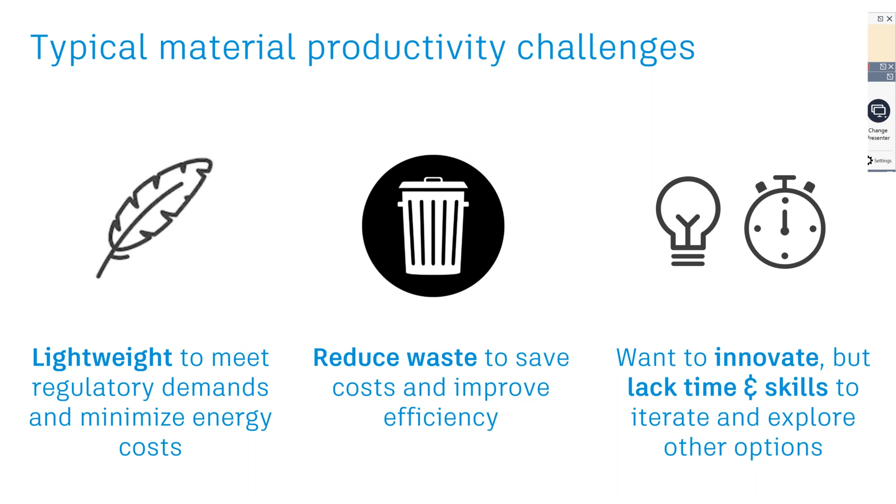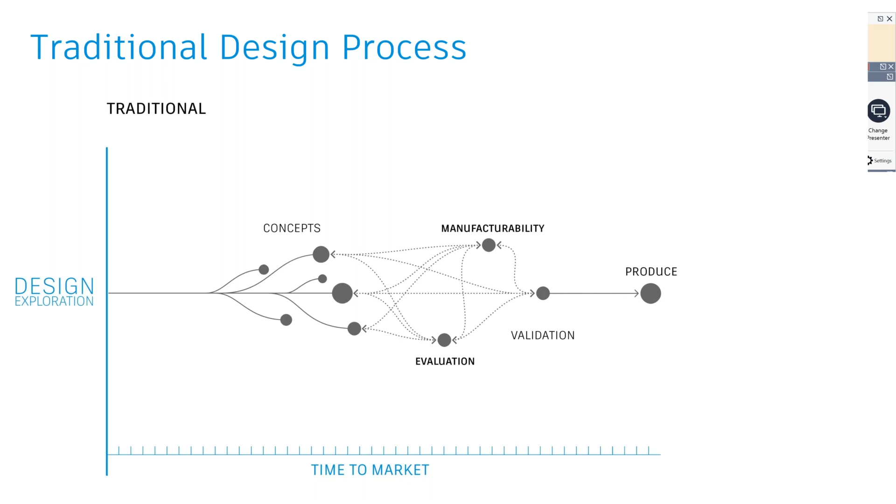So before that, let's look at the traditional design process. In the traditional design process, comparing against time to market, we have a couple of concepts which undergo evaluation, then it is tested for manufacturability and finally validated whether it can be produced or not. Once validated, it moves into production. This constitutes the overall time to market. So there is an iteration phase with limited concepts, and then design to production where evaluation, manufacturability, and validation is done, finally sent into production. This takes a considerable amount of time.

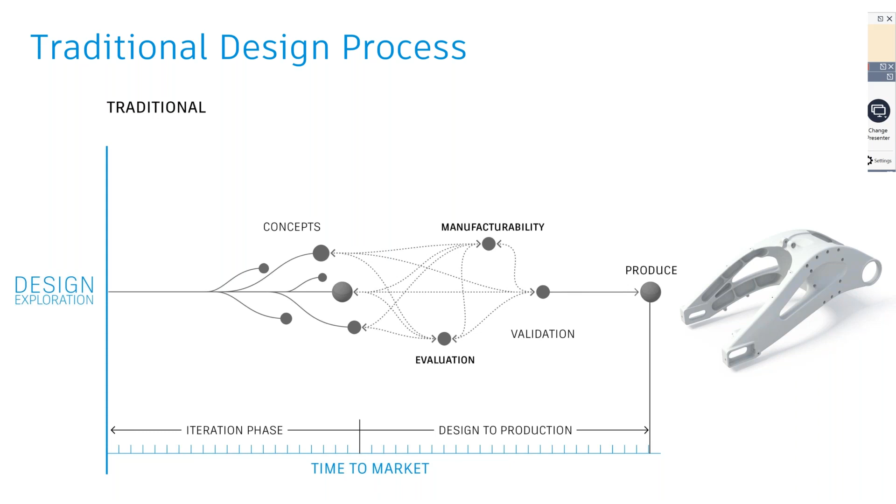So what if I told you there is a way we can expedite this entire process and have a considerable productivity increase in our overall product life cycle? Enter Autodesk Generative Design, a design exploration technology which is part of Fusion 360. This is fueled with the intelligence of humans, along with machine learning algorithms and artificial intelligence, and using the power of the cloud to very quickly provide multiple outcomes which could be production ready.

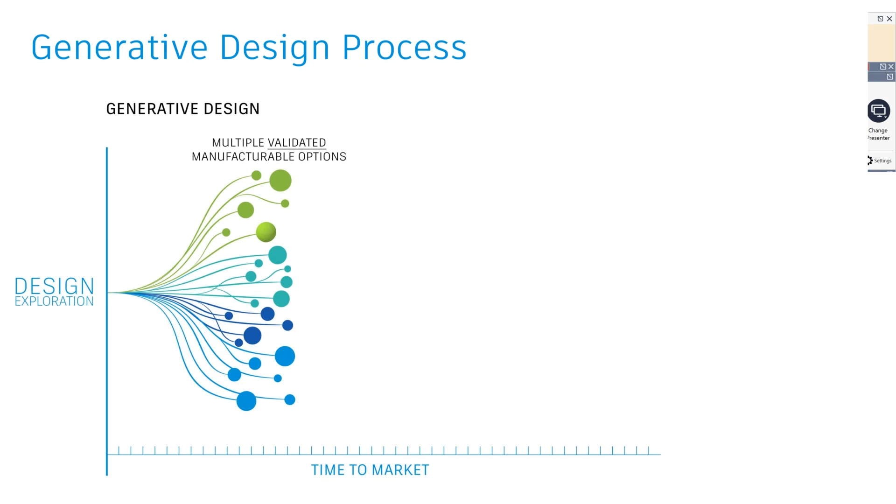So generative design is a design exploration technology which can help us come up with multiple design concepts for a single problem statement, pre-validated for form, function, and fabrication, thus helping reduce the overall time to market. In the newer approach of the generative design process, we have in the iteration phase hundreds of different concepts which are pre-validated and checked for manufacturability, whether they will function as per tech requirements, across multiple materials at the same time. What you have is either production-ready or almost production-ready CAD data which can be directly sent into the production environment. This can have a significant reduction in overall time to market, enabling a greater increase in productivity.

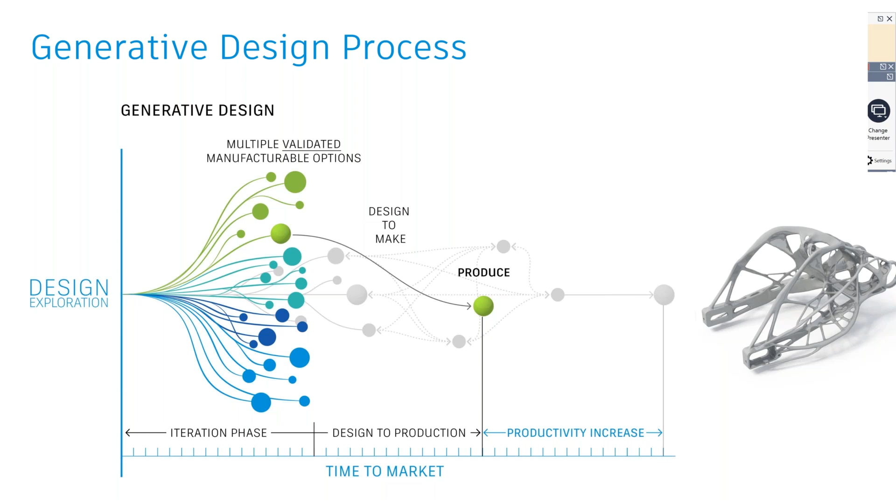Now let's look at why customers are looking at generative design. It is an amalgamation of human and machine interaction, which can help me very quickly improve product performance by means of lightweighting, or ensuring it has enough structural integrity and durability during the initial design phase itself.

It can act as a tool which can help greatly increase product innovations, explore more design concepts, check different manufacturing methods, and ensure there is no bias based on design that we as humans carry. It can also help greatly reduce product cost by lightweighting components, or reducing overall consumption of raw materials.

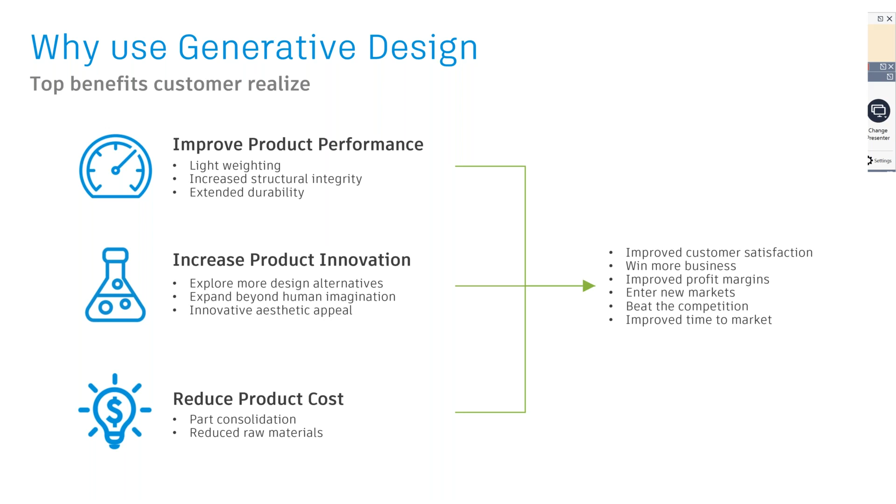Or even consolidating different components into a single functional component, thus enabling our customers to have improved customer satisfaction, improved time to market, and be a market leader in their respective spaces. So what generative design will enable you to do is create multiple outcomes which are CAD ready, or almost CAD ready.

We will also be enabling in the near future a cost estimation tool where engineers can evaluate the trade-off between performance and cost to make the component. If I use this manufacturing method, what will be the overall cost borne as against a different manufacturing method, right within the tool itself, which can help quickly make decisions and take into consideration the best manufacturing method that needs to be looked into.

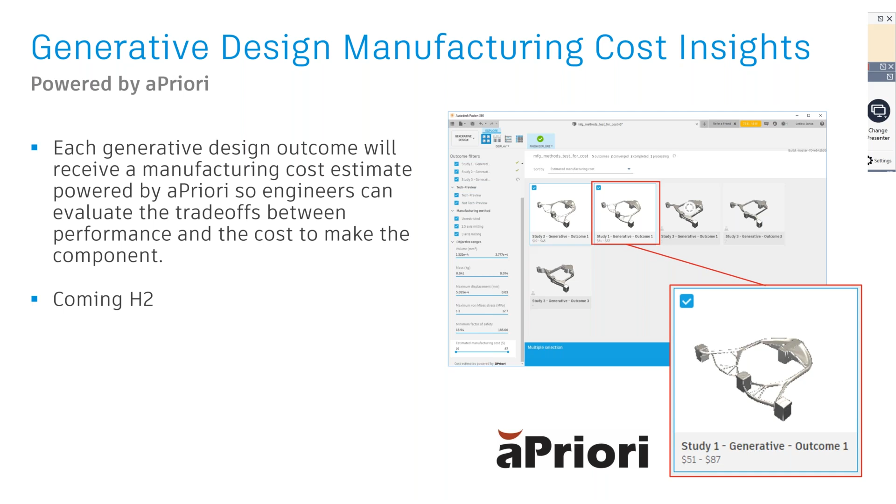Now, we have seen in the last couple of years a lot of discussions around additive manufacturing, and I know for sure that a lot of our customers have already adopted one form or another of additive manufacturing or 3D printing. It's no secret that almost always additive manufacturing outcomes provide the best performance outcomes. It can help lower my mass, come up with shapes which can be manufactured, any kind of a crazy or alien shape which can be manufactured across different types of materials.

But at this moment, there are certain things which are prohibiting us from completely exploring additive manufacturing. We see that the overall manufacturing cost is a bit higher in metal additive, and at this moment it is not ideal for large or high volume production needs.

Now, the reason I am talking about why additive manufacturing is gaining traction in the industry, as well as with a lot of R&D and money being pumped into its research and development, we will see that in the near future, additive manufacturing will become one of the premier manufacturing methods as well.

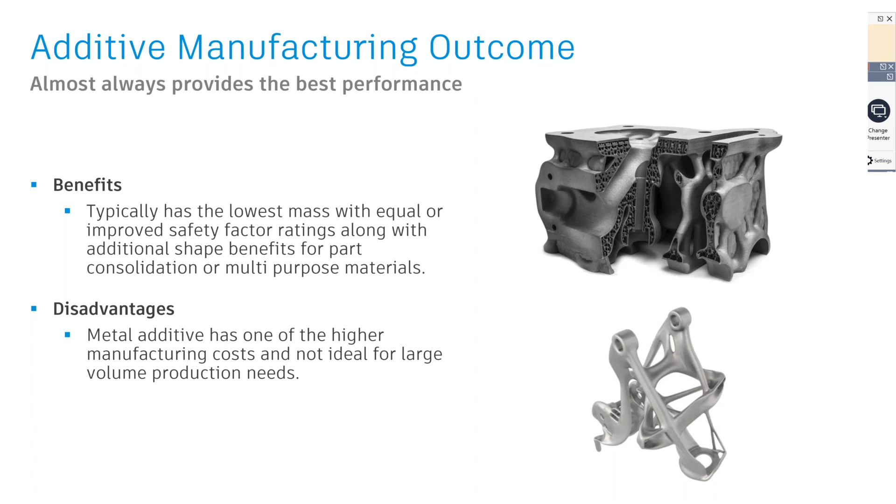Now, let's look at the overall manufacturing cost insight as against different manufacturing methods. We have already established that at this moment additive manufacturing is pretty costly and might not be sustainable for large scale volume production. But hands down, we know that CNC milling is the most sought-after manufacturing method when it comes to large scale volume production. And if it's a huge volume production, then we know that die casting by far beats everybody hands down when it comes to large production volume.

Now, one of the reasons I'm talking about this is there is a lot of confusion in the industry when we talk about generative design. Everybody assumes that whenever we say generative design, it is basically to adhere to additive manufacturing or 3D printing design. But what we have done uniquely is we have understood that at this moment the industry might not be ready for additive manufacturing, but still we would also have to support our conventional way of manufacturing.

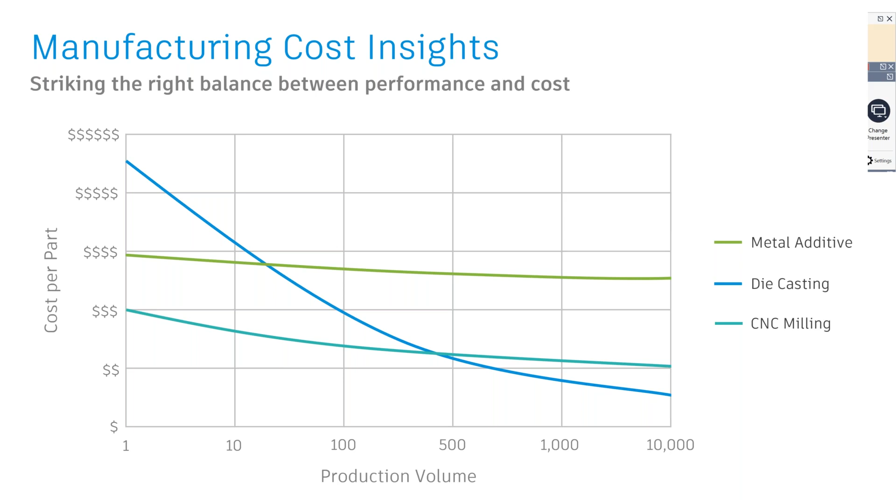That is, it could be your die casting, it could be your 3-axis milling, 5-axis milling, 2.5-axis milling, or even 2-axis cutting as well. So Autodesk Generative Design supports all these different types of manufacturing methods, and we are including other different types of manufacturing methods as well that will come in the near future. It could be different types of fabrication, molding and tool design. So all those things will come in the near future as well.

So at this moment, generative design supports additive manufacturing, die casting, different types of milling, as well as cutting operations as well.

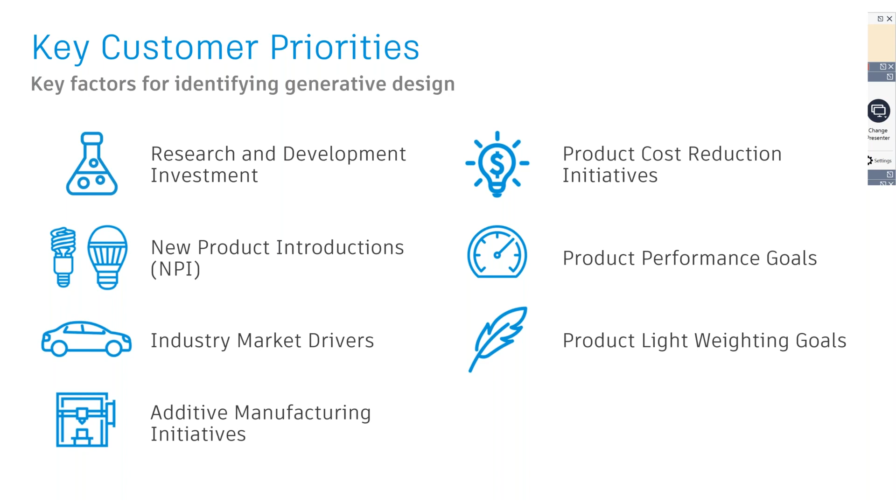Now, let's look at why you should be interested, or who should be interested in testing out or trying out generative design for their internal purposes. As customers, I meet a lot of people, and any customer who has priorities in these areas - it could be your R&D investments, additive manufacturing initiatives, huge lightweighting goals, cost reduction, or even new product introduction - Autodesk Generative Design could be the right tool for you to look into it and invest into it, to ensure that you are able to meet all your different types of priorities.

Now let's take a look at a couple of examples by means of a radar chart. From a scale of 0, which is not at all important, to a scale of 5, which is very important. If we look at the different types of customer profiles, we see that customer 3 has more number of initiatives which fall under my radar. So customer 3, customer 4, and customer 1 are most likely to gain benefit out of generative design, where it can help them to meet most of their internal business criteria or business priorities.

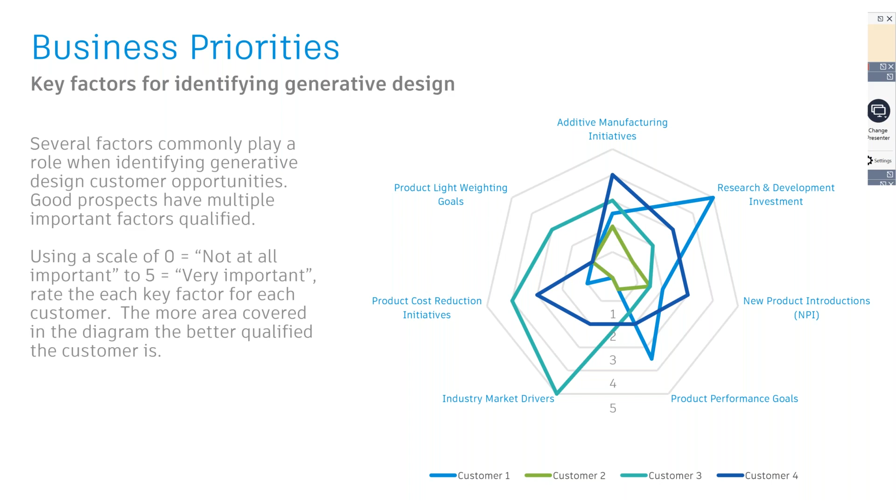And we have done this exercise with a lot of different customers. We do something called a documented discovery with our customers, where we understand their priorities, their business challenges, and their business priorities, and we map as to how different technologies can help them in terms of achieving those priorities.

And if I take a look at General Motors, where we work with General Motors very closely in terms of their initiatives on newer vehicles, on their electric vehicles, we found that most of their priorities fell under the different business priorities that they had carved out for themselves, and Autodesk Generative Design was able to fit right into their business priorities, and we were able to have a very, very healthy partnership with them in terms of enabling them to achieve their business priorities.

And in terms of industry segments, basically this is industry agnostic. It could be people from any industry, they can start using generative design for their purposes, where if their entire focus is in terms of performance, lightweighting, innovation, and also looking at different manufacturing initiatives, generative design would fall right into their priorities as well. So it could be automotive, aerospace, industrial machines, or even consumer applications.

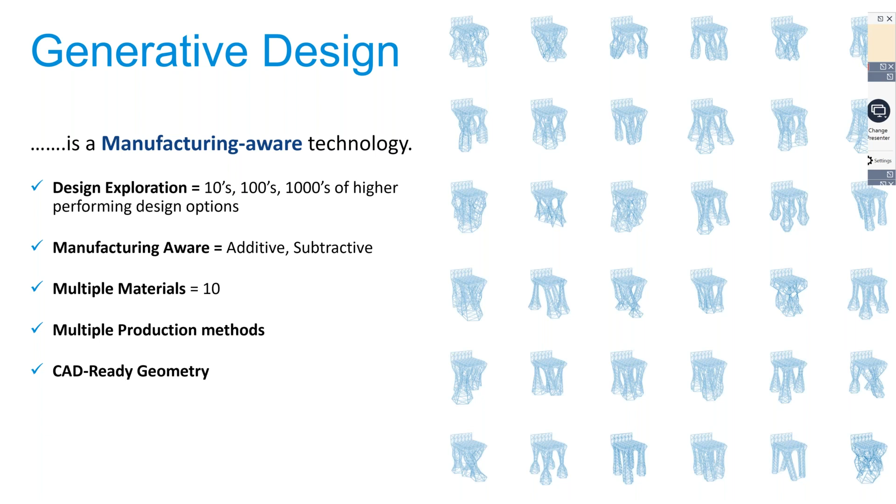It could be additive or any of the conventional manufacturing methods, and tested out for different types of materials, and the outcome will be a CAD ready or an almost CAD ready geometry which can then be sent into the production environment.

Now, the way we work with generative design is, it's basically a human machine interaction tool, where as humans we are very good at articulating a problem, defining a problem statement, or defining the goals of my particular problem.

And the best part is, all these machine learning algorithms or AI are not biased at all. It does not have any kind of design bias. And finally, equipped with the cloud computing power that is available, it can help provide hundreds or thousands of different design options for a single problem statement, out of which I can go ahead and start identifying the best possible designs which meet all my requirements or prerequisites.

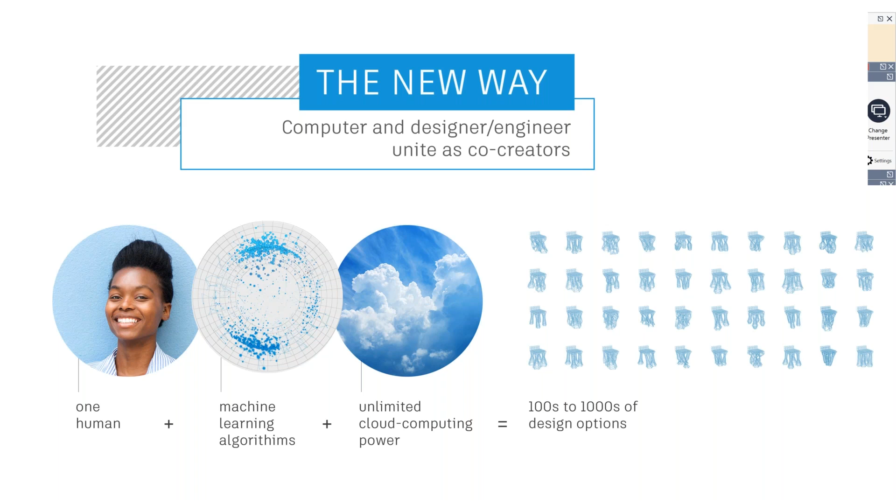Now, I talked about design bias. I'll give you a simple example. You can also think about it. If somebody asks me to design a chair, automatically my mind will go into a place where a chair will have either three legs or four legs. Reason being, from my childhood, I am used to seeing a chair which has either three legs or four legs. So most people, I'm not saying everybody, but most people will automatically start designing a chair which has either three legs or four legs.

But a system or a computer will not have this bias. This bias is called design bias. We humans are sometimes tuned by certain design bias, but a system will not have this kind of design bias.

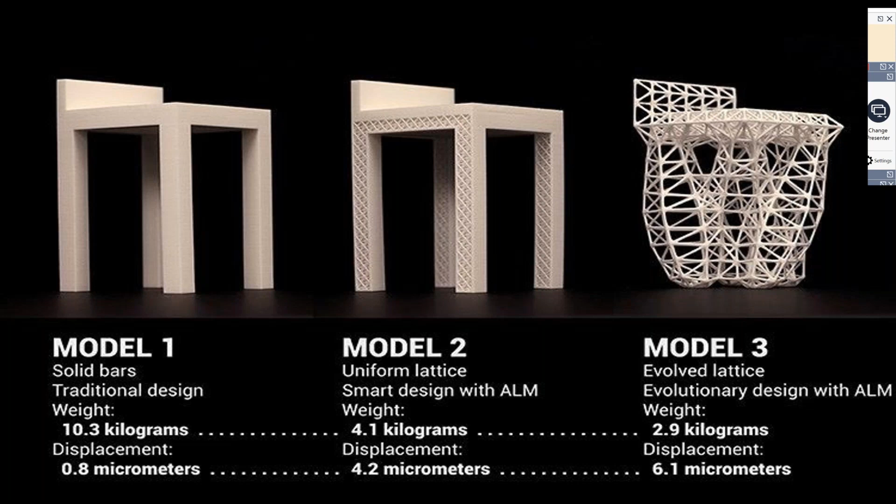So the factor of safety more or less remains the same from my generative design to my baseline design. And the overall workflow is pretty simple and easy. As an engineer, you need to set the goals and constraints. You need to define the loads, you need to define the materials, run it on the cloud. The entire solving happens on the cloud. You explore multiple results, and then if one of the outcomes is for additive manufacturing...

we have tools like Netfabb, which supports the entire design and manufacturing, especially for additive manufacturing, called Autodesk Netfabb, which helps in terms of reducing the support materials, what should be the orientation, how it should be placed, and validate the overall 3D printed part. So basically the overall workflow is very simple and easy to use.

Now let us take a look at a couple of examples of how generative design can be used at various different products or product lines. As I said earlier, generative design is not just limited to aerospace or automotive. It can be used by industrial machinery or any different industry. So let's take a look at a pick and place assembly. A pick and place assembly will basically have a modular structure which houses the vacuum pumps and the air channels. Now, if I want to reduce the overall weight of this particular modular structure, how will I go about it?

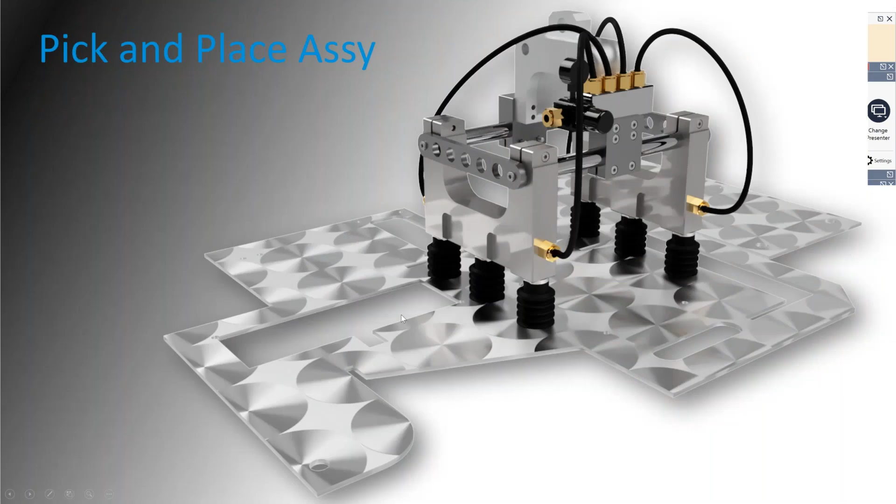So basically, if I have to define a pick and place assembly, it will have a vacuum cup with air channels along with modular structures.

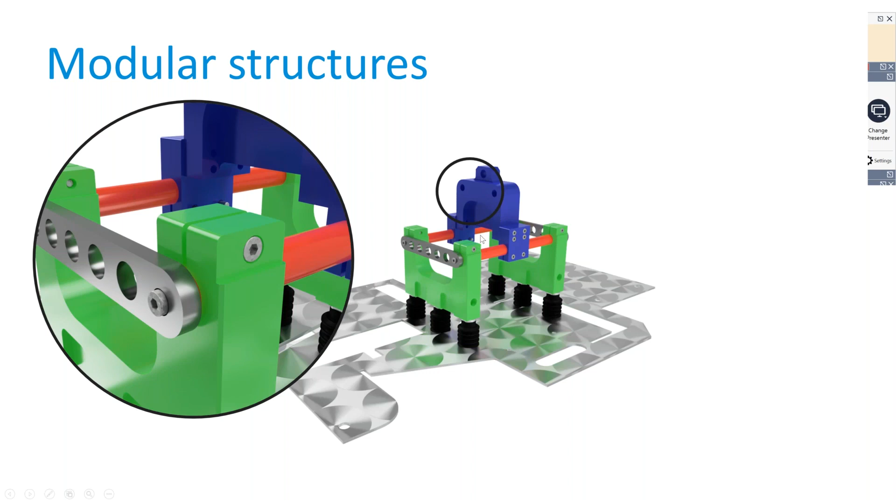So these structures, I need to make much more efficient and lightweight. I'll run the generative design on top of it, keeping in mind where it is being constrained, where it is being fitted, whether it is bolted, how it has to be placed, and what are all the different loads that will be applied during the operational activity.

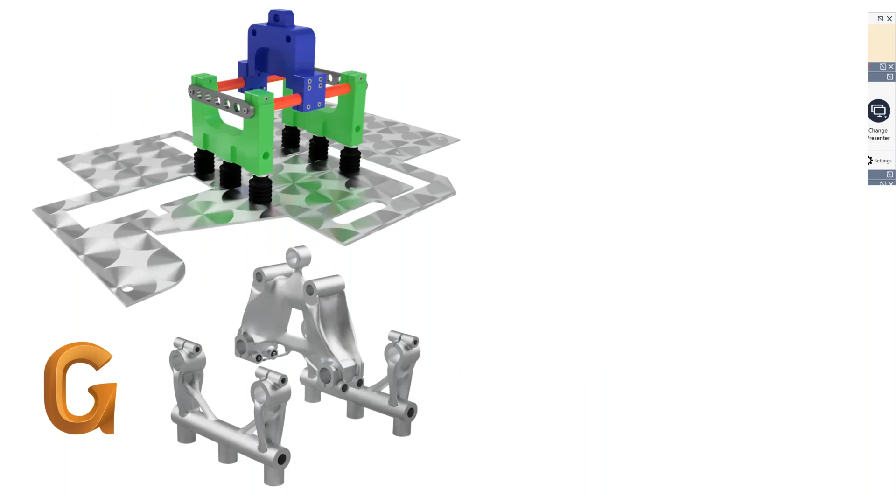Upon which I start getting different types of outcomes which can be tested upon. One of the outcomes is a shape like this, where it is much lighter than my original shape, and we can see a lot of material has been removed. But at the same time, it does not compromise on the factor of safety.

Or it can come up with a very, very alien looking shape which can only be manufactured using a 3D printed part. But the benefit here is now three different components are fused into a single component, consolidated into one working part.

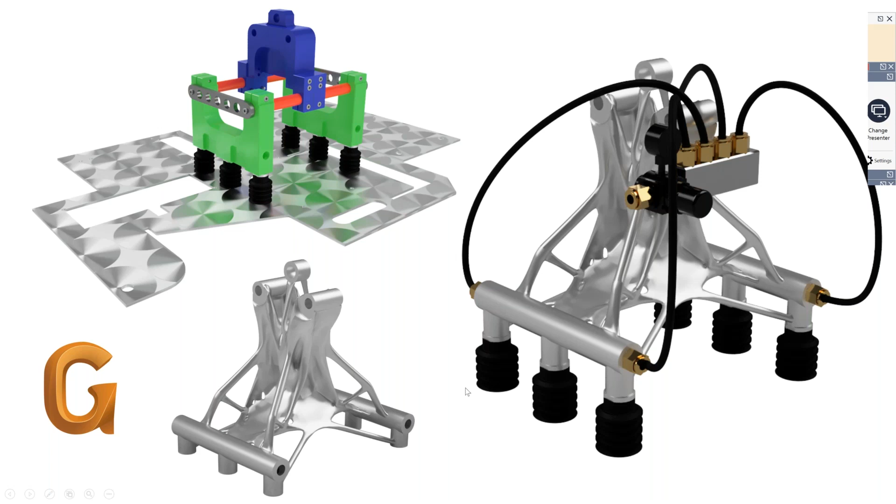And then I can go ahead and test it out for various other manufacturing methods as well, not just 3D printed, but for others as well.

So one example is 3D printed, where I am now taking this into Netfabb to check for my orientation, the support structures, and which is the best possible position it has to be placed, so that I have more outcomes and less wastage.

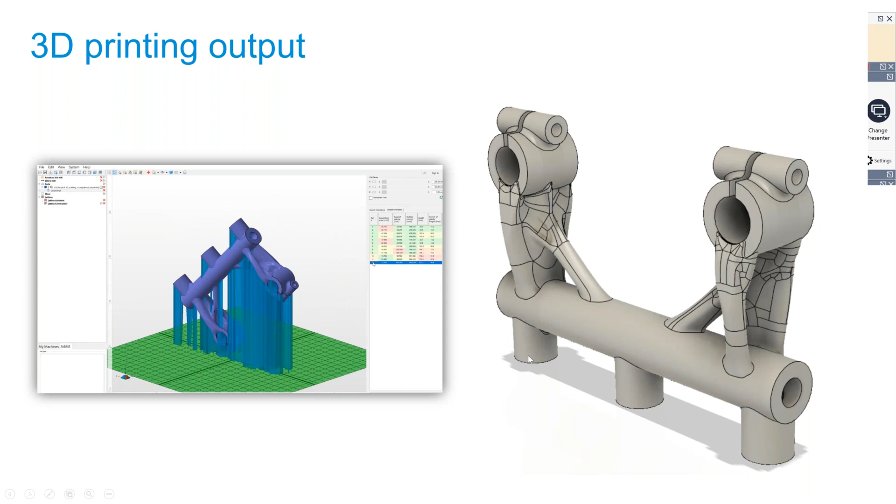Or it can be tested for a milling operation, where I can go ahead and mill it and check for different types of cycle times that we can generate out of it.

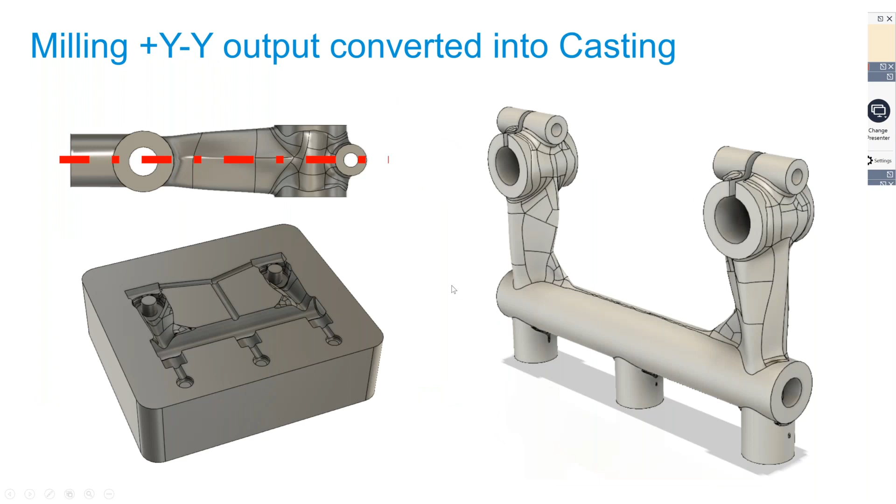Or it could even be a casting option that you can generate out of it. Or I can even run a 2.5-axis milling operation, where I can further enhance the model to have various different shapes and sizes which meet the criteria for 2.5-axis milling operations as well.

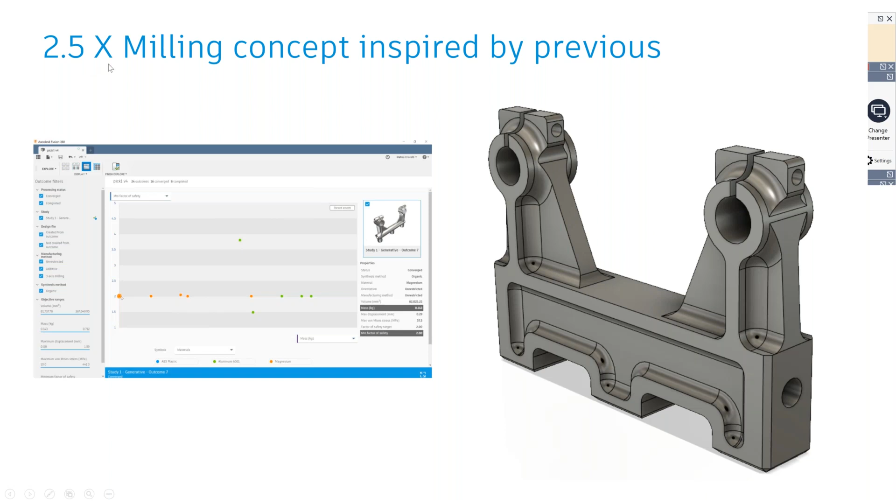Now let us take a look at a different example. This is a bracket. This was one of the first benchmarks or proof of concept that we did with General Electric.

This is a GE bracket where they wanted to drastically reduce the weight of this particular bracket. So the entire problem definition or problem statement was defined, with the different loading conditions, the different materials, and they wanted to test it out for additive manufacturing only.

So in this case, as designers, what do I know? I know that this bracket is being placed and it is part of a much bigger assembly. It is being fixed at these four locations, and there is a clevis pin which will be connecting with another moving component across this particular region.

So how will I start going about my work in generative design using Fusion 360? There are certain things that need to be defined. I'll just repeat it again for the sake of clarity. In this case, what is my problem statement?

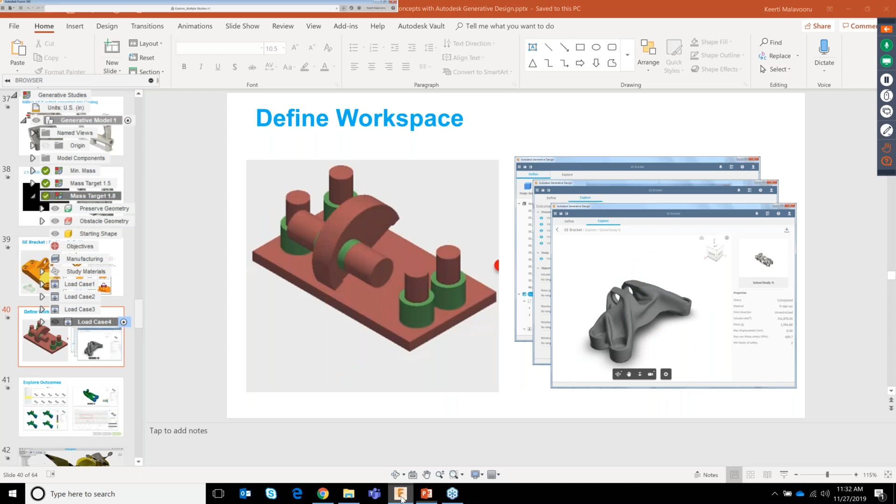So using this as a starting point, how do I start defining my conditions? This is Fusion 360. So if people are not aware about what Fusion 360 is all about, Fusion 360 is a cloud-based 3D CAD CAM CAE tool which can help you in terms of your entire product life cycle in a single tool.

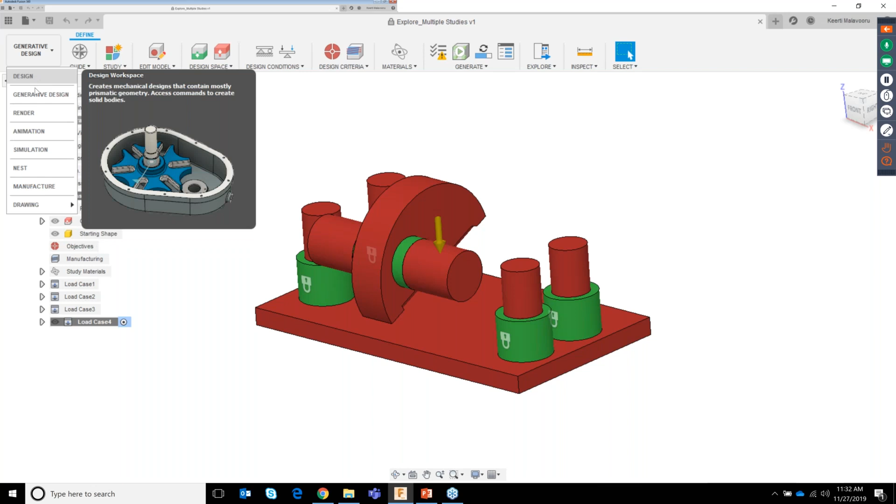So if you look here, I can do my entire design, generative design, rendering, animation, simulation, nesting, CAM, as well as create my documentation or drafting right within a single window itself.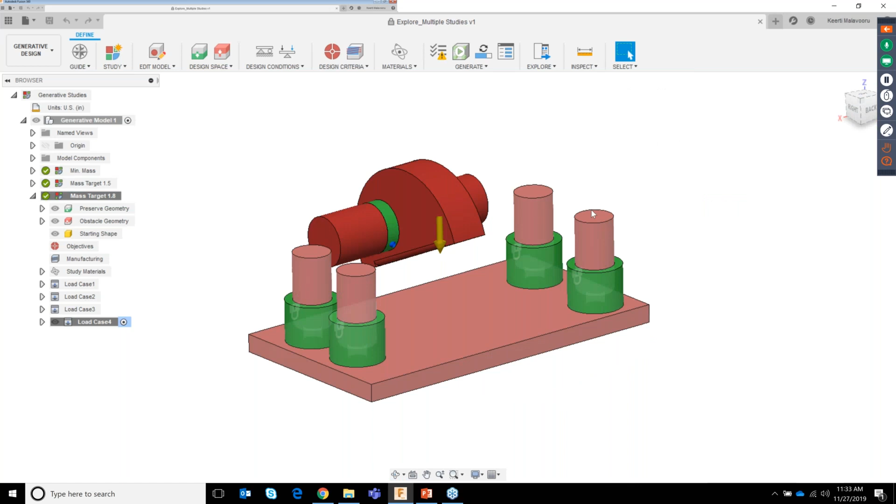So what I need to define is basically these are my regions which have to be preserved. What it means is this is required for me to start iterating to create multiple concepts - these 4 bolting locations and the locations where the clevis pin is going to go.

Next is I also need to define my obstacle geometry. It means that there will be a pin that will be inserted here, so I don't want any kind of material to be added here, because there will be another component that will be placed which will be assembled by means of the pin. So I need to ensure that there is no material added here, and there should not be any material that passes through my bolted holes as well. So I just define my preserve geometry and my obstacle geometry.

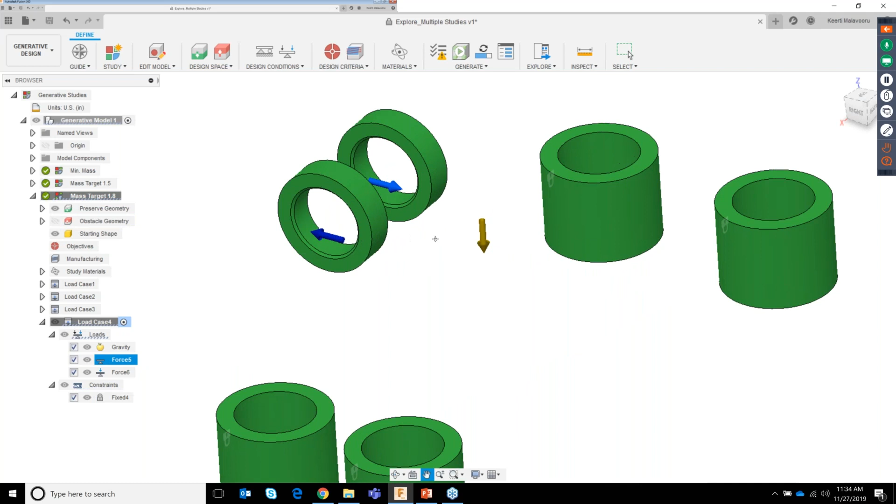Next thing what I need to define is my constraints - how it is being constrained. I know that it is being constrained at these 4 locations, so it is fully fixed. And then I define my forces - what are all the different forces that will be acted here? In this case, it's a torsional force that will be acted, one in this direction and other in this direction. I can add different types of forces - pressure, moment, and bearing load - and define my forces here.

Once this is done, the next thing I need to define is what are the objectives for it. Do I want to minimize mass, or do I want to maximize stiffness? If I want to maximize stiffness, I need to provide the safety factor and what is the bare minimum mass target that I would want to achieve. If you also want to test it out for your modal frequencies or vibrations, I can define that as well - my first mode frequency, and what should be the maximum displacement that it can incur during the creation of different models. I can define my displacements in various different directions as well.

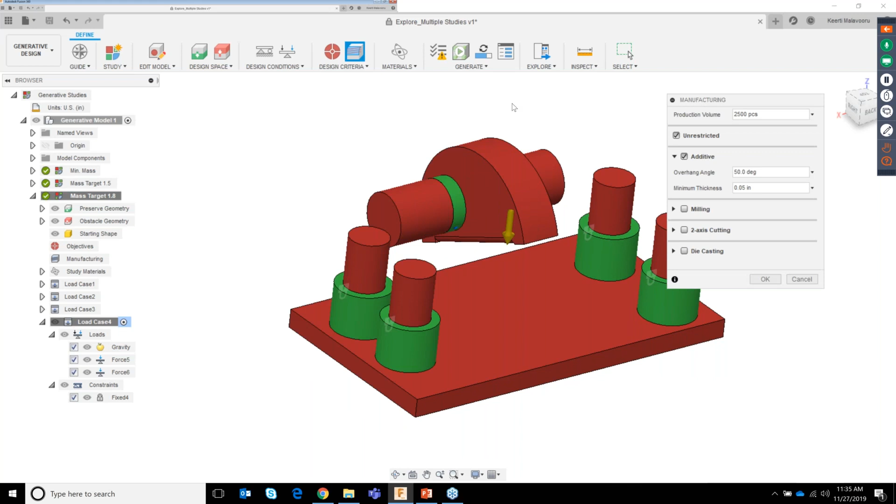And then I define my different manufacturing methods - how many pieces I want, the different types of manufacturing methods, whether it is additive, what should be the overhang angle or the minimum thickness. If I am defining it for milling, whether it is 3-axis milling, 2.5-axis milling, or 5-axis milling, what should be the tool direction, only in Z plus or Z minus, or in all directions. You can define your tool diameter, shoulder length, head diameter, everything. In this case, I'll not be using milling.

You can also perform 2-axis cutting operations in different directions, X, Y, or Z. And if die casting is something that you want to look into, I can start defining where the ejection direction should be, the draft angle, and the minimum and maximum thickness can also be defined.

Once I define my manufacturing methods, I can start adding the different materials I want to use. I can analyze or iterate up to 10 different materials for a single problem statement - different types of materials that are available. It comes with a huge library of materials, either for metals, liquid, glass, and other things.

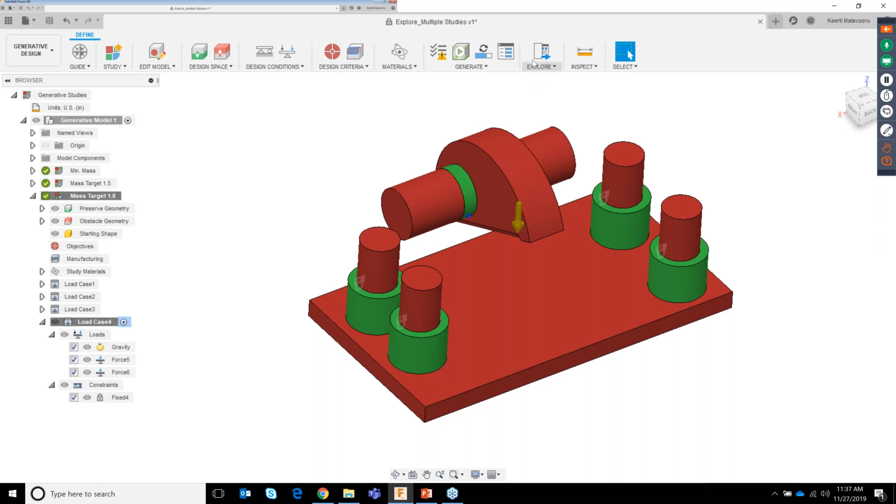You already have a huge library of different materials available, and then you can go ahead and generate. What it will do is, once you define generate, it will push the entire data onto the cloud, and very quickly different concepts will be created and sent to your system for a detailed study or analysis on top of it.

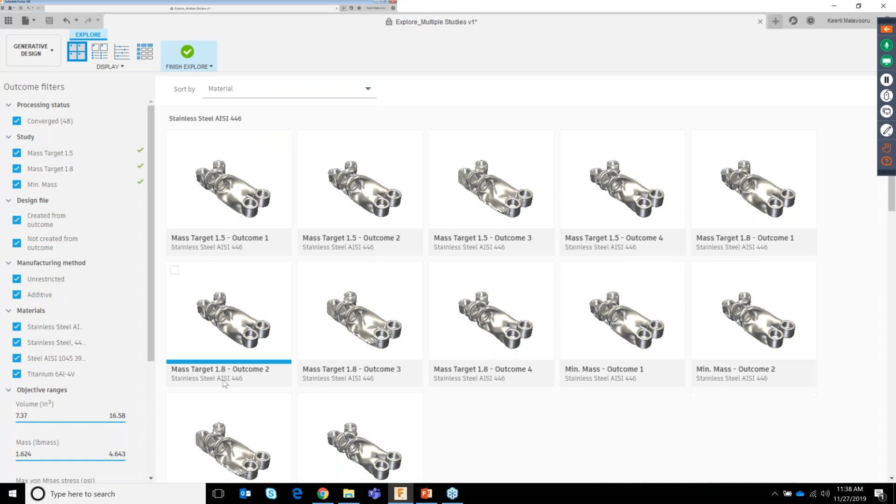So in this case, I have already run the iterations, and I have multiple different types of designs or concepts that have been created for different manufacturing methods, whether it is additive or unrestricted, or if I would have defined other manufacturing methods - those would also be available for different types of materials, whether it is stainless steel, different grades of stainless steel, or titanium or any other materials that you have defined, or based on the different mass.

So it varies from 1.624 to 4.643. Or even on the left hand side, you can go ahead and start filtering out by volume, by mass, or your von Mises stress, factor of safety, etc.

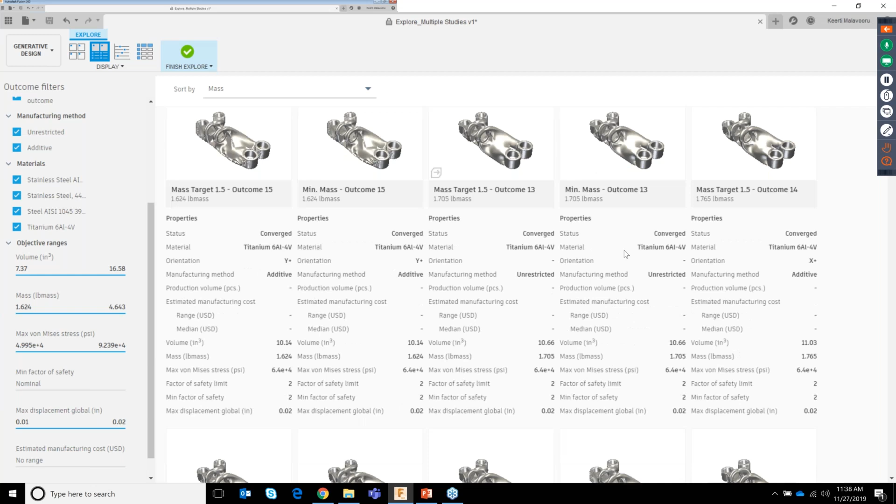There are different ways by which you can go ahead and filter out solutions. We have thumbnail views, I can do a side by side comparison of different types of results that have incurred, or a scatter plot view where you can see the outcome against minimum factor of safety and materials, or manufacturing method. Or if you want to check for minimum factor of safety, I can analyze it for different types of results or outcomes that are available.

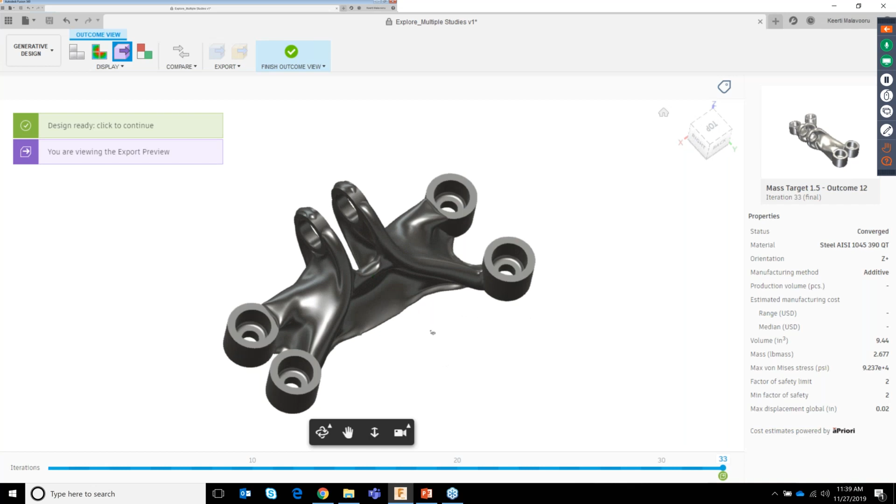So let's look at a couple of those things. I can go ahead and have a much more detailed understanding of my particular design. It shows me how my design has been created. I can check if there are any kind of stresses that are generated. I see that there are some stresses generated here. What is the maximum stress? What is the mass and other things?

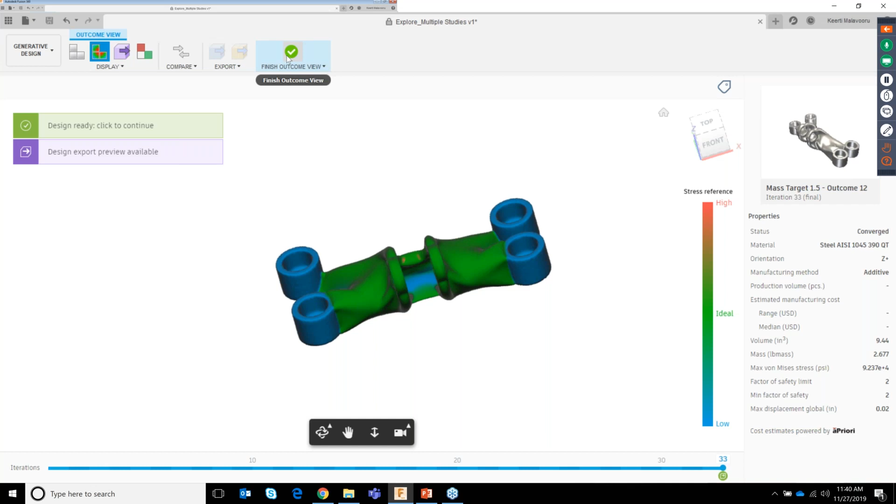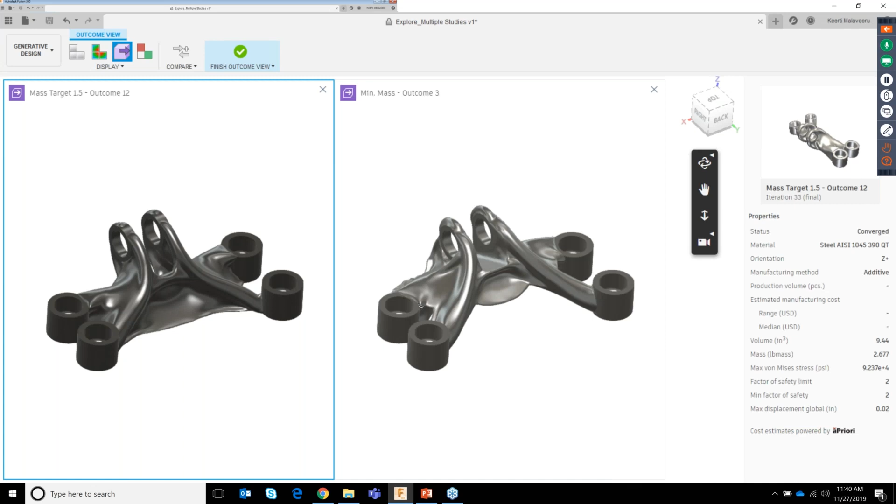Or I can even go ahead and compare it with different models, have a side by side comparison between different models, as against two different models. I think both of them are more or less the same, but I hope you got the gist of it, where I can see how the overall factor of safety is, and the strength, where my stresses are, high stresses are, and all those things can very easily be viewed using the outcome viewer in generative design.

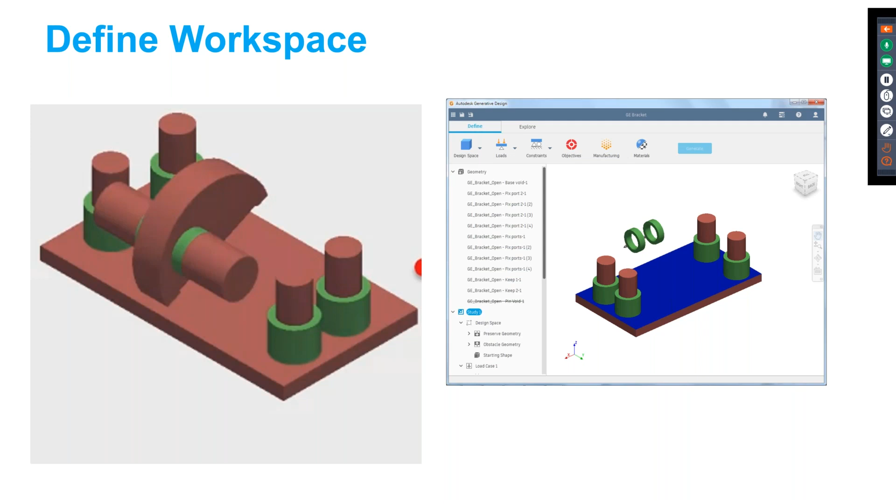So I hope you got the point. The overall workflow is very simple. You need to define the goals, create preserve regions and the regions which will act as an obstacle, define your loading conditions, define constraints, add materials, add different types of manufacturing methods, and run the analysis. The analysis runs on the cloud, and very quickly it will throw you different types of results through which you can start filtering out those results which best suit your requirements and needs.

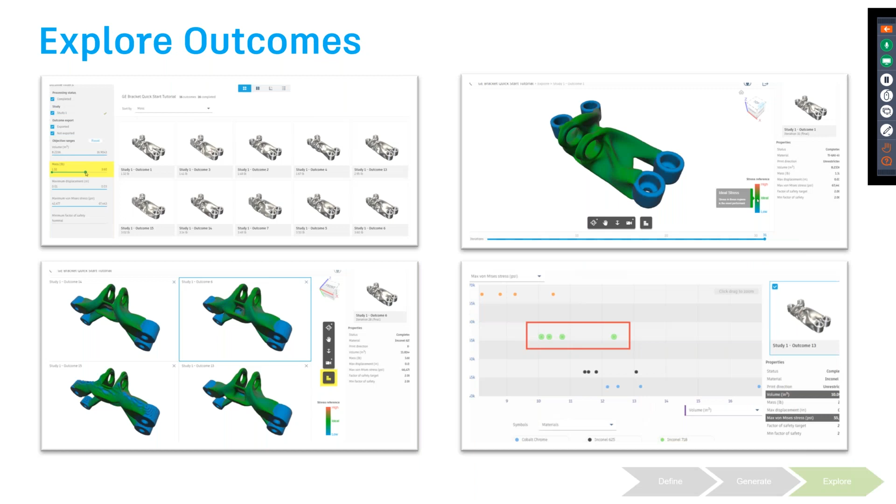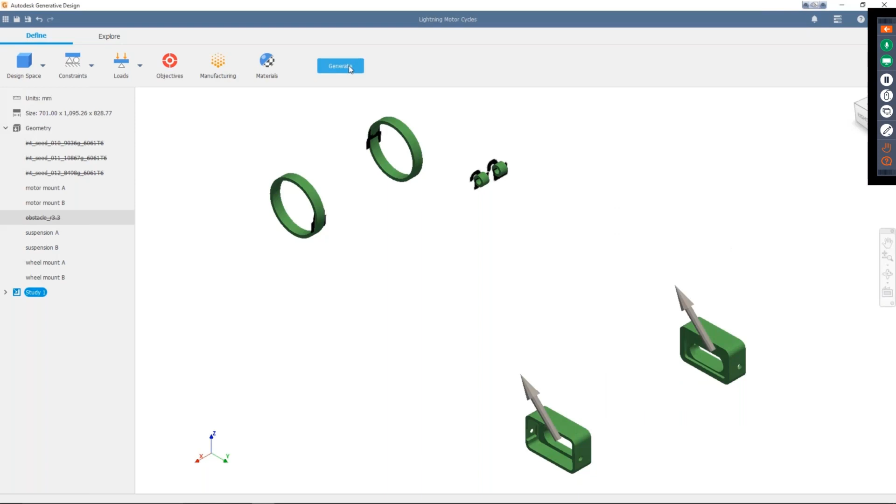Similarly, we have another example. This is an example of a swing arm of a two-wheeler, where the customer wanted to drastically reduce the weight of it. So they first identified their design goal, where it is being constrained. They mapped it for various different manufacturing methods, materials, and their objectives, out of which they generated multiple outcomes.

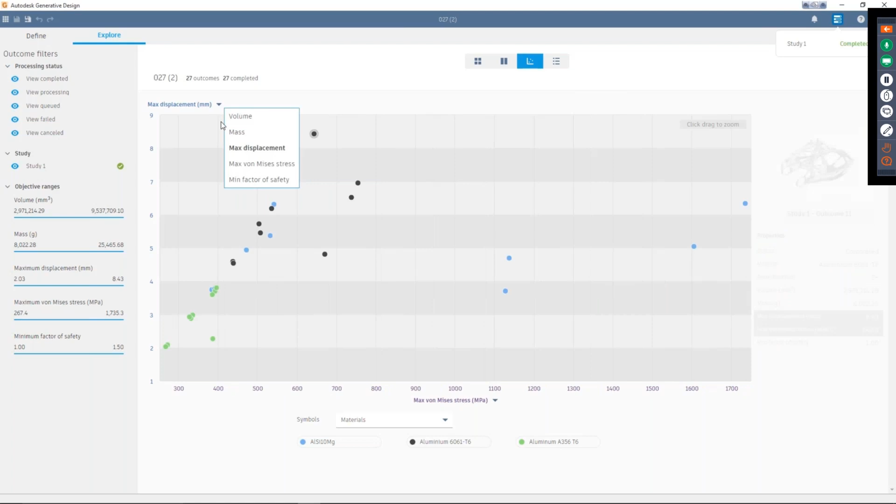And they started filtering out those which follow their particular technical criteria. Using those 3 or 4 final design outcomes, they did a much more deep dive on the outcome, analyzing it for various different types of FE analysis to understand its structural integrity, whether there could be any failure that we can anticipate.

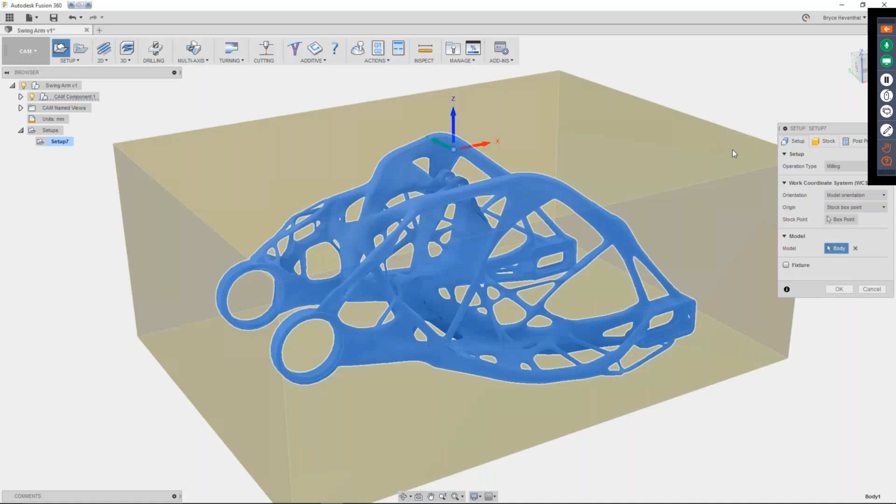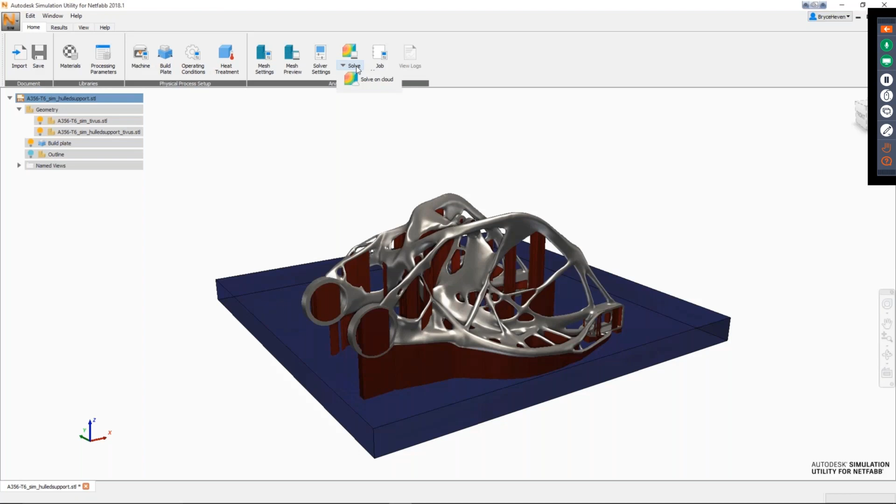And then using the CAM functionalities right within Fusion, they were able to create the CAM programming for a hybrid manufacturing, that is your 3D printing and finally finishing it off with conventional or subtractive manufacturing. So they used Netfabb to understand how the support structure should be and the structural integrity of the support structure, and finally used Fusion CAM to do the finish touches on that particular swing arm.

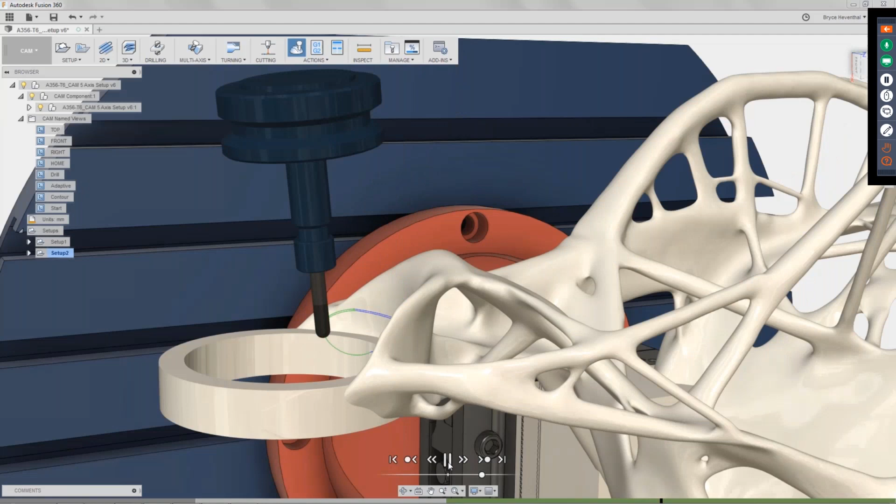Now this is being manufactured and is already being rolled out to their customers, which is a much more efficient as well as reduced weight version of the original swing arm.

Now let's look at a couple of customer stories around the world, across various industries and across various different types of manufacturing methods. The first one is General Motors.

So we work very closely with General Motors in terms of their business goals to have a lightweight vehicle, as well as in their electric vehicle program, where one of their concerns was not only in terms of reduction of weight but also in terms of reducing the number of moving components. So one of the major goals for them was to have more components fused into a single component.

So they identified one of the seat belt brackets, and they wanted to fuse or consolidate 8 moving components into a single part, which should be 40% lighter and 20% stronger.

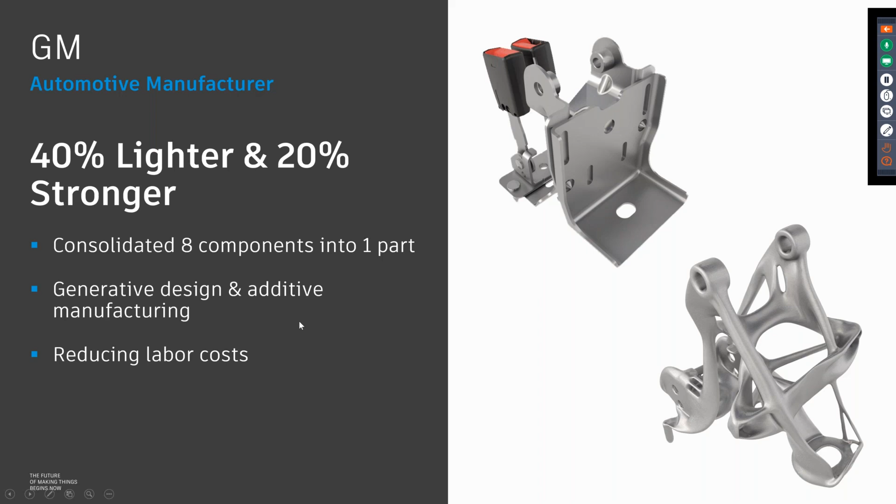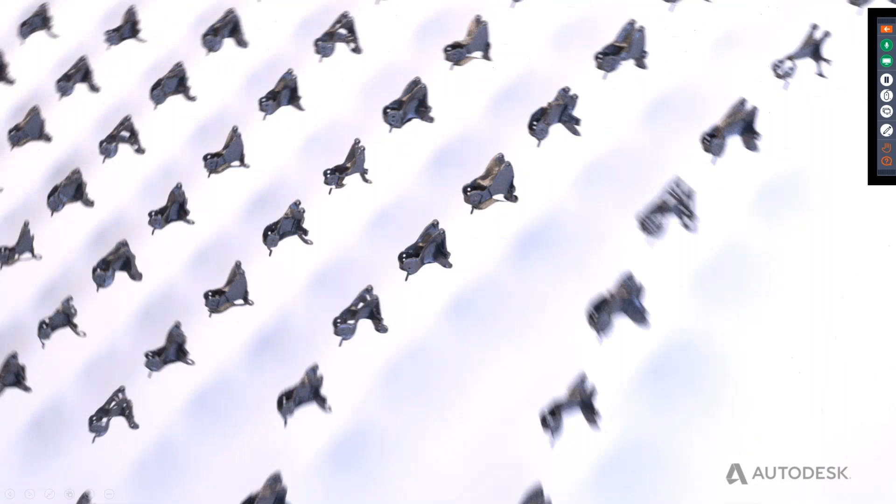So they used Autodesk Generative Design and were able to come up with multiple outcomes. They did a deep dive in terms of different manufacturing methods, structural integrity, and validation, and were able to freeze upon a couple of those designs, which are now being tested rigorously for feasibility and workability. This is a completely 3D printed part, being researched and tested in their facility right now. This was a seat belt bracket, and they were able to successfully fuse 8 moving components into one single component.

Similarly, this was for an aerospace customer. As you know, in automotive or aerospace, every gram that is saved or reduced has a big impact on performance and fuel consumption. So they wanted to drastically reduce the overall weight of their brackets used at multiple locations, and they were okay with additive manufacturing and using generative design. They were actually able to reduce their overall weight from 325 to 135 grams, while using titanium as their material.

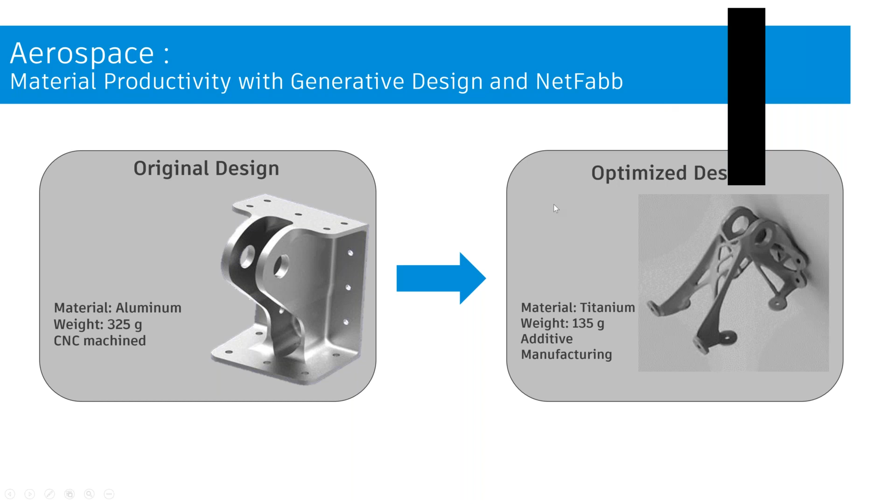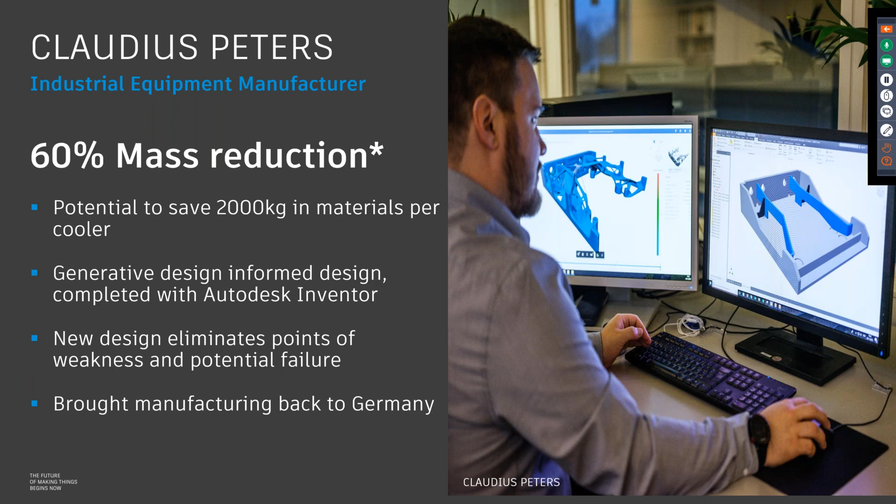Again, one more manufacturing customer, Claudius Peters. They basically make clinkers used in cement production facilities, where this clinker is subjected to very high temperatures, and currently this is a very heavy component. They used generative design to drastically reduce the weight of those clinkers from close to 150 kgs to around 50 kgs, reducing two-thirds of the overall weight, without changing their manufacturing method - still using conventional manufacturing to produce these components. This is used at various stages, not just a one-off component; there will be hundreds and thousands of these used. Imagine the amount of cost and material being saved, as well as them being a sustainable customer in terms of reducing overall consumption of raw material for manufacturing these components.

We also work with a lot of different space organizations. NASA is one such, where for one of their landers, they wanted to use generative design and come up with an entirely different shape, which led to a 35% reduction in overall mass. Imagine the amount of fuel that will be saved during the launch process. They are validating it with various different manufacturing methods, where it will be a hybrid of different manufacturing methods used for the final production.

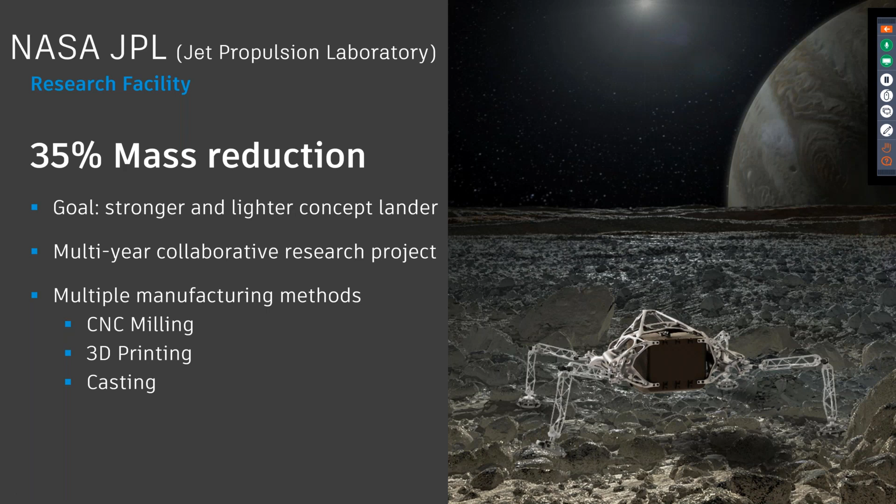Finally, Airbus is using generative design to drastically reduce the weight of one of their partition walls. You would have seen a partition wall in an aircraft that separates the cabin from the crew. Currently it's a hard mass of metal or composite, which is very heavy in nature. They wanted to drastically reduce the weight, because reduction in weight means reduction in fuel consumption. They were able to reduce 45% of the mass from their original design, and came up with an entirely new shape which follows all their structural and functional protocols.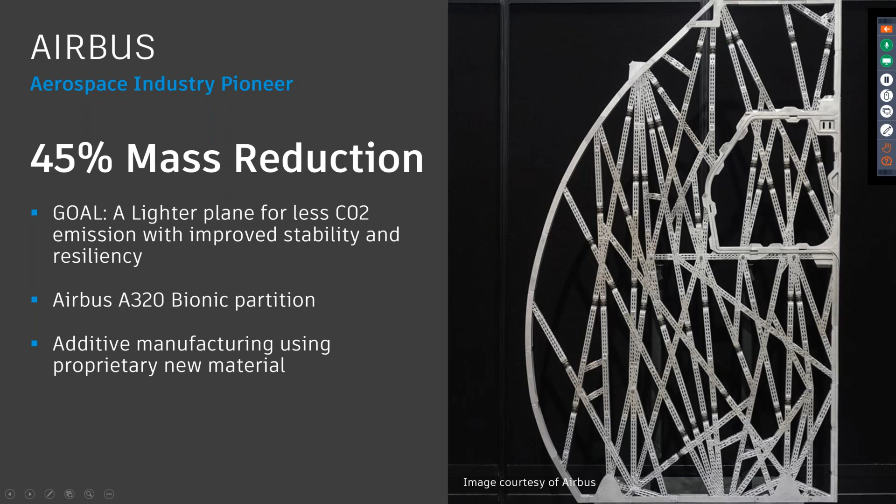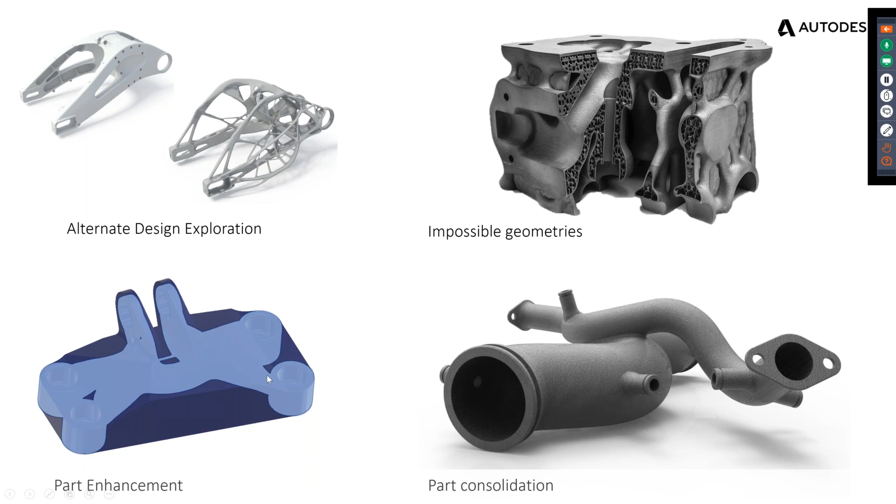So the way our customers around the globe are using generative design is either to have an entirely new design exploration or a design concept for their baseline design, or to look at impossible geometries, or even enhance their existing models for much more innovation, performance, and lightweighting. Some customers are utilizing generative design to consolidate their multiple components and have a single fused component out of those different sub-assemblies as well.

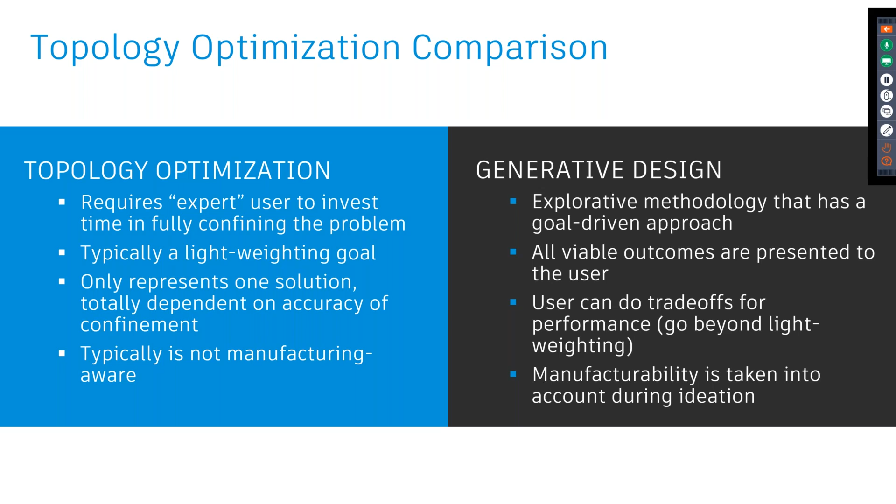Now, what we are also seeing is there is a lot of confusion in the market in terms of what generative design is versus what topology optimization is. To simplify it: in topology optimization, you already have a shape, and you are reducing the material or weight of that shape by removing certain portions of the material. But in generative design, you are starting from a clean slate where you just have the design goals or design intent, out of which a shape will be generated for you that follows all manufacturing protocols in terms of form, function, and different fabrication methodologies.

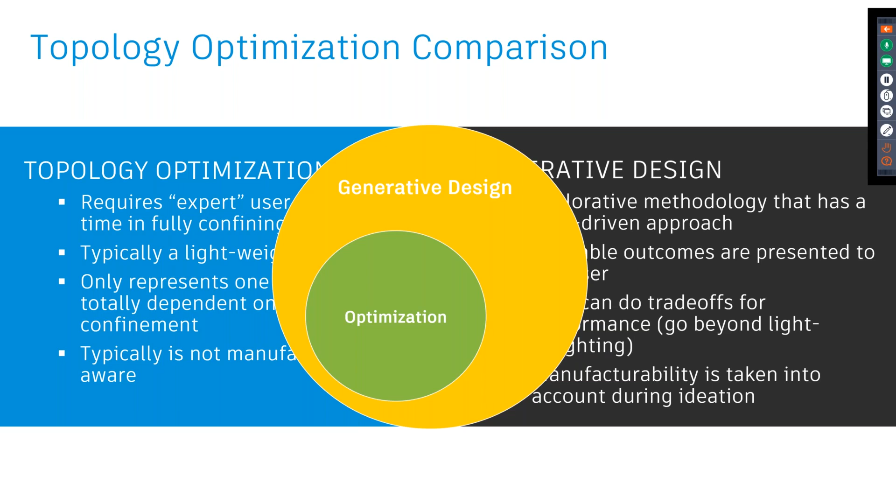Now, there are various ways by which generative design is available to our customers. As I said earlier, generative design is part of our Fusion 360 offering, where Fusion 360 is a cloud-based CAD, CAM, and CAE tool, and generative design is now a part of it. If you are already a Fusion 360 customer, you will get generative design as part of Fusion 360, along with 100 cloud credits. I'll talk about what cloud credits are in the next slides.

If you're a customer of Autodesk Product Design and Manufacturing Collection, which comes with 13 plus different product portfolios, right from Inventor, Nastran, CAM, Factory, 3ds Max, and Navisworks, it also comes with Fusion 360. So customers who have Product Design and Manufacturing Collection also have Fusion 360, and generative design comes along with it. For those looking at procuring generative design, you can either look at Fusion 360 as a standalone tool, or you can procure Product Design and Manufacturing Collection, which includes Fusion 360.

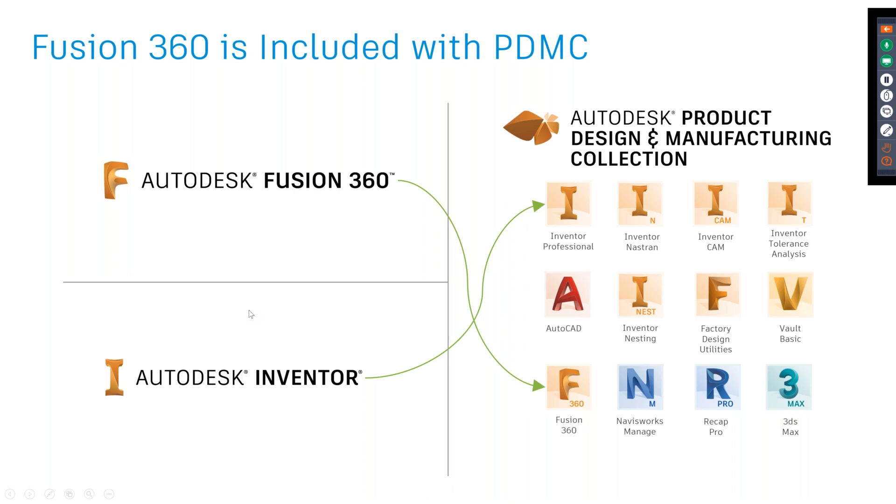As I said earlier, Fusion 360 and generative design work on the cloud platform, and the entire analysis or iterations to generate multiple outcomes happens on the cloud. So when it happens on the cloud, you need certain cloud credits to consume and run those analyses. To run a generative design study for your setup and generate outcomes, you will need 25 cloud credits. Imagine cloud credits as a unit, so you need 25 units of cloud credits to set up and generate the outcomes.

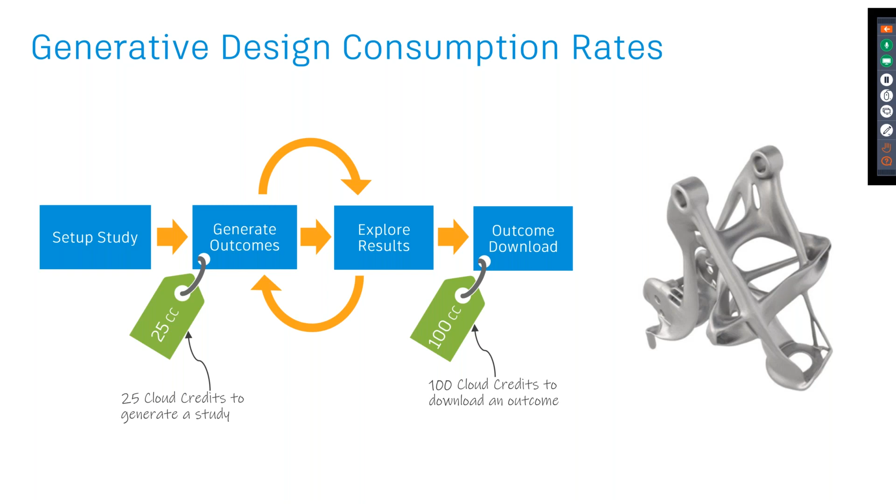If you want to explore the results, where you want to take the data that comes either as a STEP file or directly in Fusion, download the outcome as a STEP file or any other format, and then further refine your model in your existing CAD environment, you need 100 cloud credits to download the outcome. So on average, roughly—it's not a number set in stone—to run and explore results, you would need 125 cloud credits.

There are various subscription models that can enable you to use the cloud credits. We have Fusion 360 with cloud credits, which comes with a pack of 1500 cloud credits, or a 5-subscription pack of Fusion 360 that comes with 7500 cloud credits. I would request, if you are interested, to reach out to your partners, your resellers, or even to us directly to check the pricing, and we'll be happy to help you on that front.

Now, having said that, there is good news—great news actually. For our customers, what we have done is, if you want to try and test out generative design, we are giving free generative design till end of December 31st, 2019. You have unlimited access to generative design cloud credits till December 31st, 2019. So if you are a customer with access to Fusion 360, you can test out and execute multiple benchmarks, projects, and proof of concepts using generative design and the cloud credits, completely free till December 31st, 2019. You have close to 30-35 days through which you can go ahead and test out generative design.

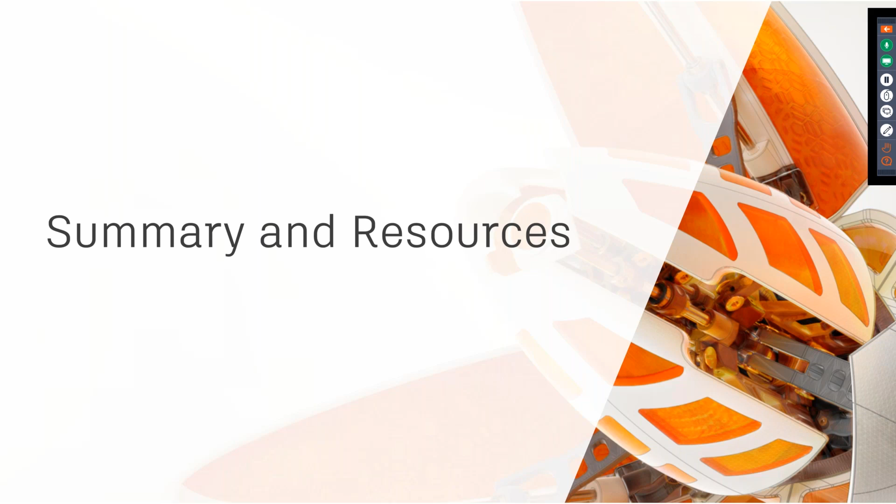For people who already have Fusion 360 with them, there are a lot of resources available within our portfolio. You can go to our website and see a lot of data, intro videos, help videos, and getting started documents on generative design. There are also a lot of customer case studies, across different manufacturing methods and industries, which you can go through to see how they are leveraging generative design to be much more efficient, optimized, and sustainable.

If you have already installed Fusion 360, you have a lot of self-help tutorials available right within it, which can help you with step-by-step procedures for using generative design from scratch: how to set up the model, build it, run it, analyze it, and generate useful outcomes out of it.

There is a question asking about a plugin, and also whether we need a basic drawing for doing further design. Basically what you need is a design goal: what is the design for, where it is being fitted, and the different working conditions, and you should be able to use generative design.